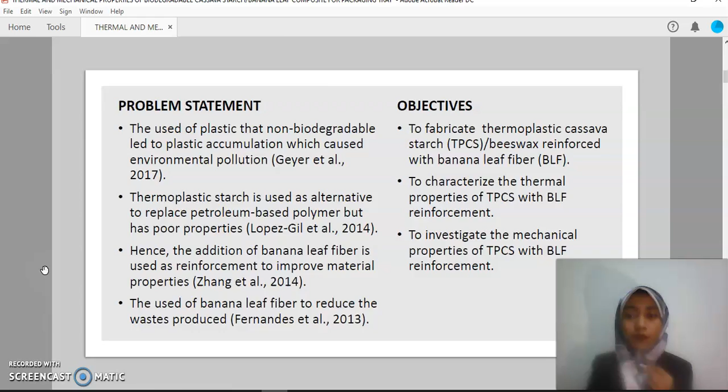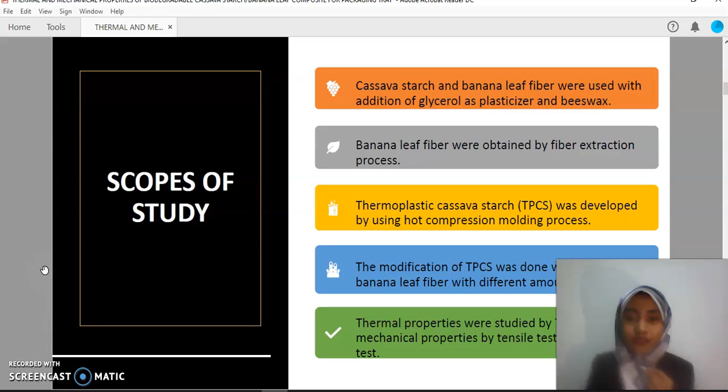The scope of study: cassava starch and banana leaf fiber were used with the addition of glycerol as plasticizer and beeswax. Banana leaf fiber was obtained by fiber extraction process, and then pure TPCS was developed using hot compression molding process. After that, the pure TPCS will be modified with the addition of banana leaf fiber, and then we will study the thermal properties by TGA test and mechanical properties by tensile test and flexural test.

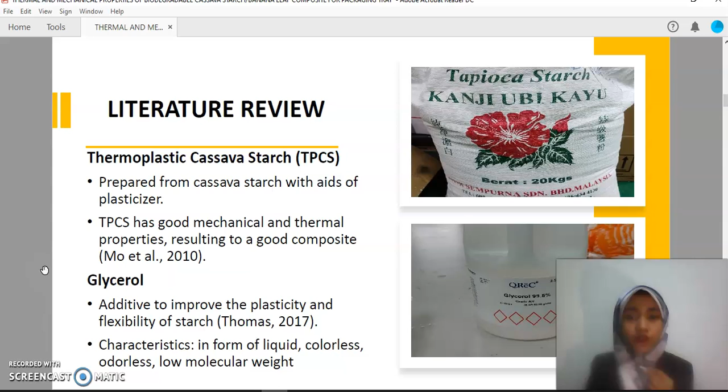For literature review, thermoplastic cassava starch is prepared from cassava starch and plasticizer, which is glycerol. From the previous study, we know that TPCS has good mechanical and thermal properties. Glycerol is used to improve the plasticity and flexibility of starch.

Banana leaf fiber is a lignocellulosic fiber, which is a natural fiber obtained from plant. It mainly contains cellulose, hemicellulose, and lignin. It also has low density, high toughness, heat resistance, and most importantly, it is biodegradable. That's why we chose it as a reinforcement agent.

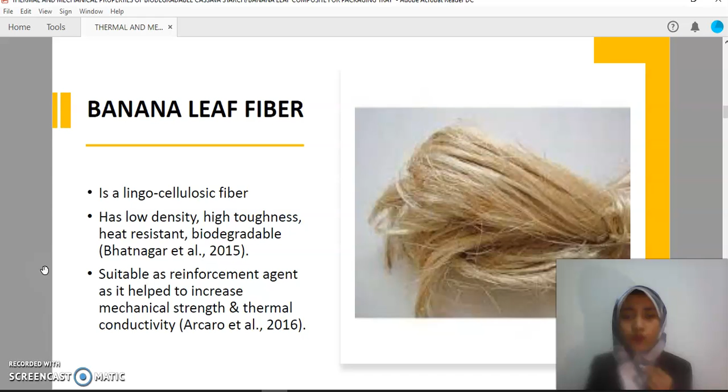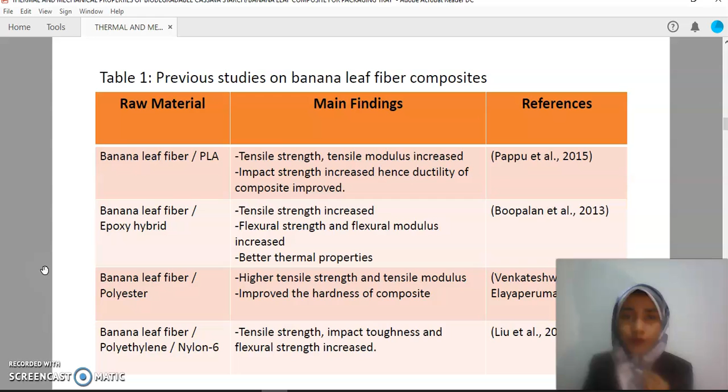This is the previous study that used banana leaf fiber, and all the studies show good results, which is improvement in mechanical properties and thermal properties. Beeswax is classified as a natural wax obtained from honeybees. We use it to reduce moisture absorption because it is hydrophobic.

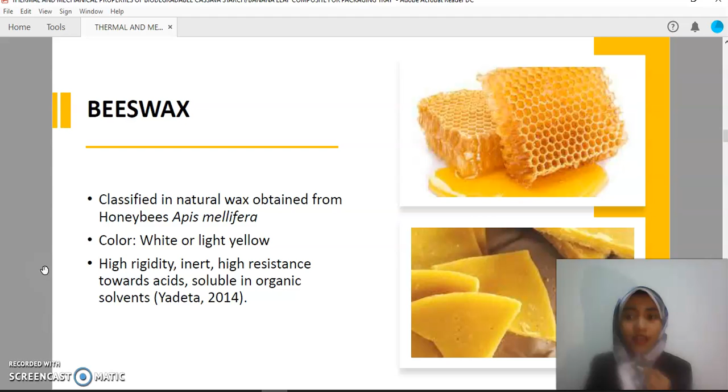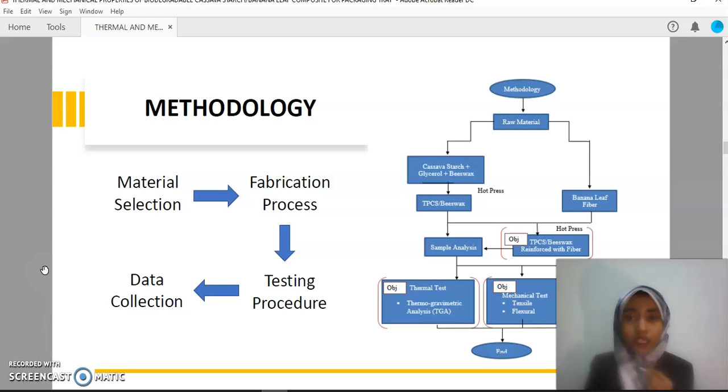Next, we go to methodology: first select the material, then fabricate the sample, and after that undergo testing and data collection. This is the flow chart of my study.

The first process is fiber extraction for the banana leaf fiber. We undergo the water retting method—I soak the banana leaf in water for 4 weeks to make the surface smoother so it will be easier for fiber removing. Then the drying process: I dried it under sunlight and put it in the oven after that for 5 hours at 100 degrees Celsius, and then the fibers were cut shortly, about 2 mm.

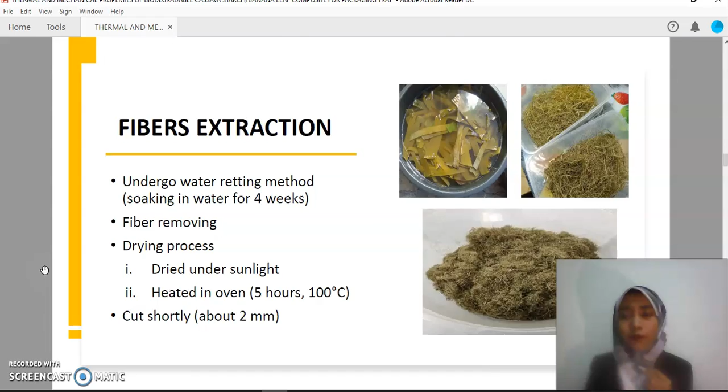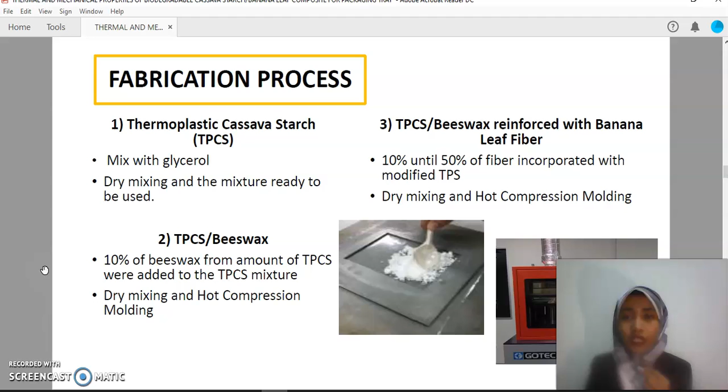For the fabrication process, first we produce the mixture of TPCS, where cassava starch is mixed with glycerol by dry mixing, and then the TPCS was added with 10% beeswax, from a total amount of TPCS of 58.2 grams, then undergo dry mixing and hot compression molding. After that, the TPCS-beeswax will be added with banana leaf fiber from 10% until 50%.

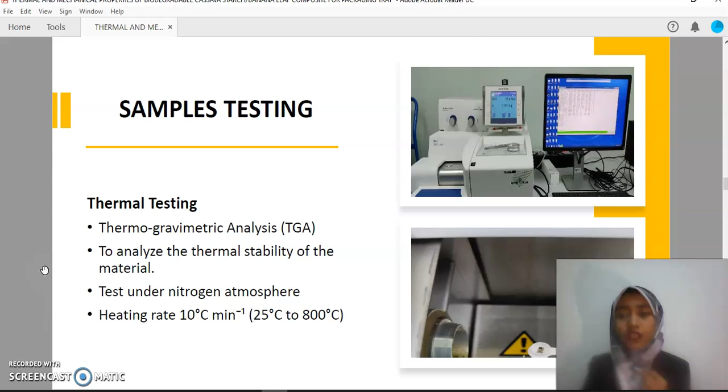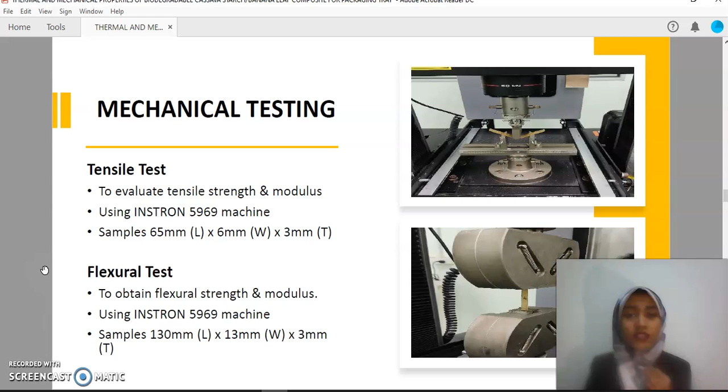For sample testing, the thermal testing undergoes TGA test, which is thermogravimetric analysis, to analyze the thermal stability of the material. We use nitrogen gas and test from 25 degrees Celsius until 800 degrees Celsius. For mechanical testing, the tensile test is to evaluate the tensile strength and modulus, while flexural test evaluates the flexural strength and modulus. Both tests use the same machine, the Instron 5969 machine, but with different measurement.

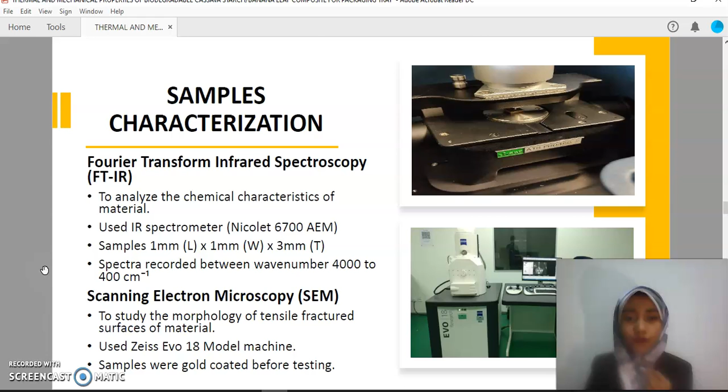For sample characterization, Fourier Transform Infrared Spectroscopy (FTIR) test is used to analyze the chemical characteristic of the material, while Scanning Electron Microscopy (SEM) test is used to study the morphology of the tensile fractured surface of the material. The samples were first gold coated before testing.

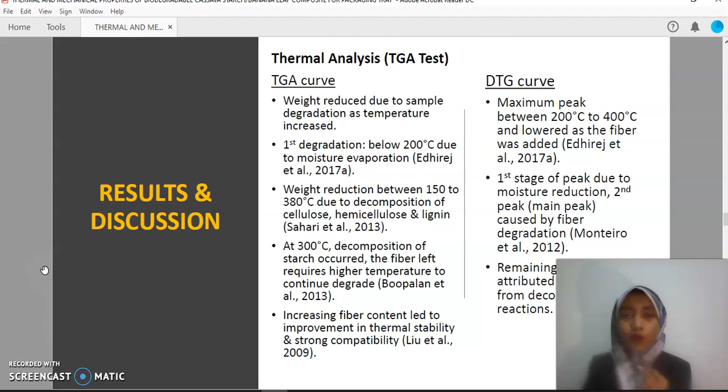This is the result of my testing. For the TGA test, we obtain two curves, which is the TGA curve and the DTG curve.

First, for the TGA curve, we can see here that the weight reduces as the temperature increases. For the first degradation below 200 degrees Celsius, it is due to moisture evaporation, while between 150 to 380 degrees Celsius, it is due to decomposition of cellulose, hemicellulose, and lignin. And at 300 degrees Celsius, it is due to decomposition of starch.

We can see that from 0 to 50% fiber content, the thermal stability increases as the fiber content increases. For the DTG curve, we can see that the maximum peak is between 200 and 400 degrees Celsius, due to fiber loading. For the first stage of the peak, it is due to moisture reduction, while the second peak is caused by fiber degradation.

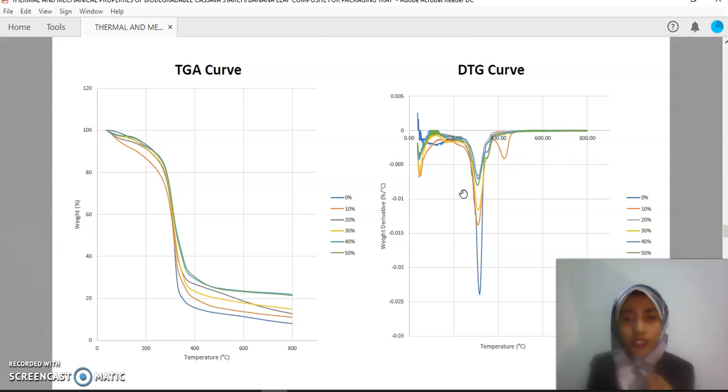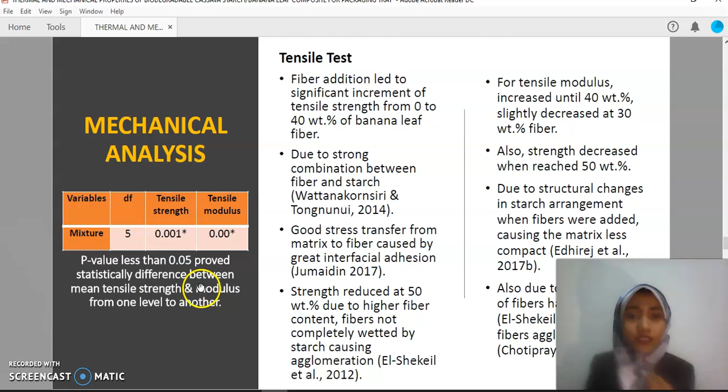The fiber addition led to significant increment. Why significant? Because I ran the ANOVA analysis, and it showed that p-value is less than 0.05. So it proved that there is a statistically significant difference between mean tensile strength and modulus from one level to another.

The significant increment is due to strong combination between fiber and starch. From previous study, it also says it is due to good stress transfer from matrix to fiber caused by great interfacial adhesion. However, at 50%, the strength reduced. It is due to higher fiber content, so the fiber is not adequately wetted by the starch, causing agglomeration. We can see the agglomeration in the SEM test result after this.

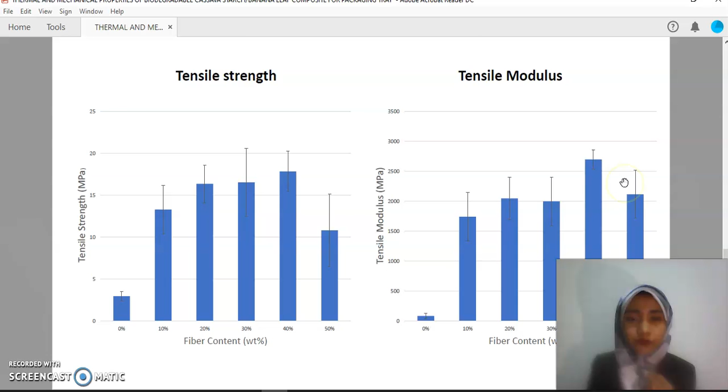For tensile modulus, it also shows the same trend, but slightly decreased at 30%, and then reduced at 50% fiber content due to structural changes in starch arrangement when fiber was added. So the composite becomes less compact.

And then for flexural test, also similar trend with tensile, which is optimum fiber at 40%, and then reduced at 50%. Why? Because higher fiber content will cause weak fiber distribution and non-uniform interfacial bonding, and then the matrix is also insufficient to cover the surface of the fiber.

Next for FTIR test, we can see several chemical groups here, first the OH group. We can see it shifted to lower wave number, from 3288 to 3281. This is due to hydroxyl groups in the fiber components.

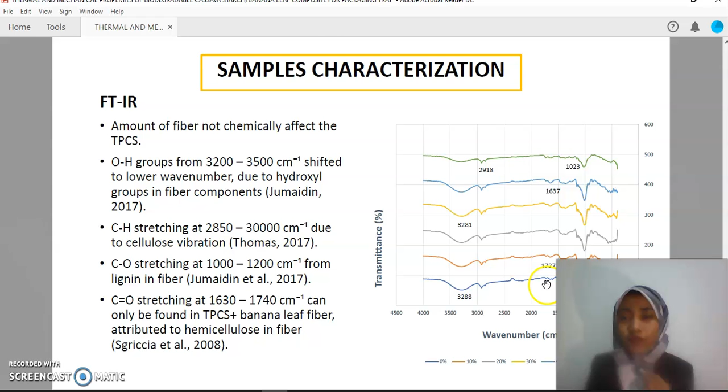Then CH stretching at 2850 to 3000, due to cellulose and hemicellulose vibration, while the C-O stretching at 1078 to 1023 is caused by lignin in the fiber. The C=O stretching we found here, but only in the composite material with banana leaf fiber, because this is caused by hemicellulose in the fiber, so the C=O stretching is absent in pure TPCS.

So the conclusion is: by TGA test, the thermal stability increases when the fiber content increases. The mechanical strength, the highest is observed at 40% fiber through tensile and flexural test. So we know that mechanical properties also increase with addition of banana leaf fiber.

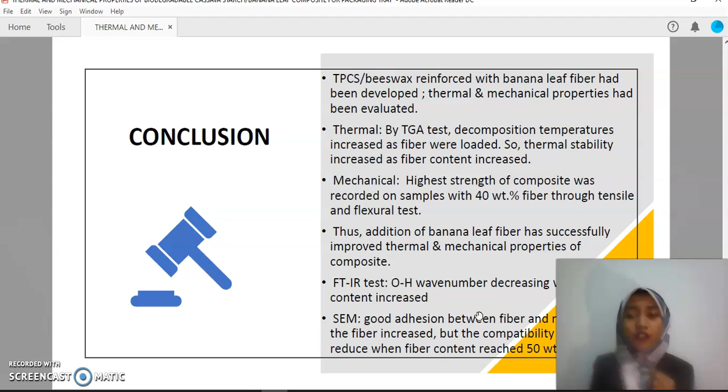For FTIR test, the OH wave number decreases when fiber content increases, which helps to increase the mechanical properties. And for SEM, good adhesion between fiber and matrix is seen when fiber increases. This supports the tensile, mechanical, and thermal testing. So we know that 40% is the optimum fiber content to be used in the composite.

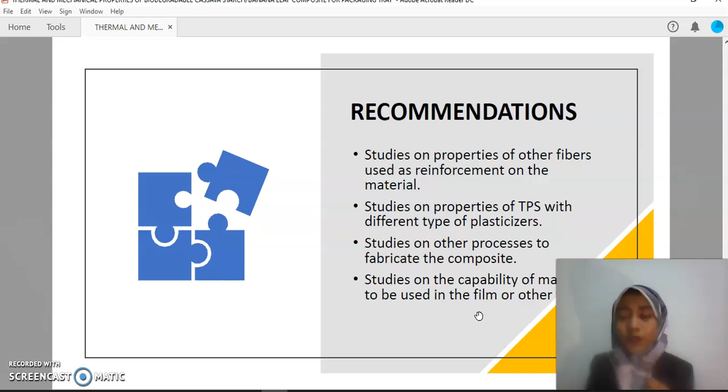Recommendation is on the properties of other fibers to be used as reinforcement, and then studies on properties of TPS with different types of plasticizers such as sorbitol, and then studies on process to fabricate such as using open molding, and last, studies on the capability of the composite material to be used in film or other forms.

This is the product innovation. We target it to be used as a packaging tray or single-use plastic product replacement. This is the example, and here in my hand, this is the packaging tray made from banana. It can be used as a packaging tray as shown in the slide.